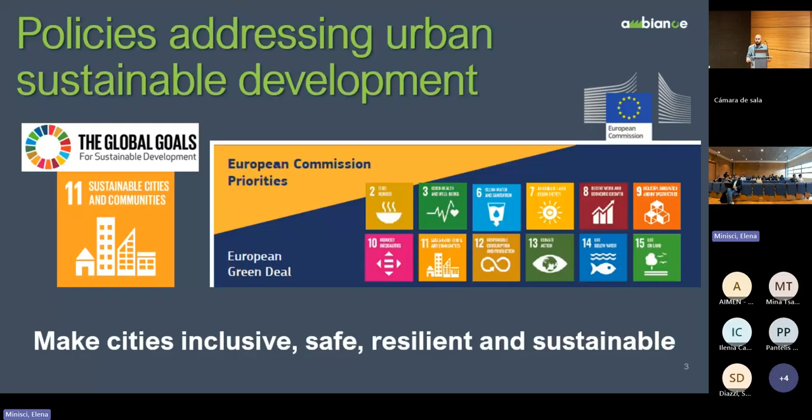So it is quite important that urban development is guided in a sustainable, resilient way, so that this will contribute to the sustainability and sustainable development of the whole society.

In this context, the AMBIANCE project tries to address problems of development in urban spaces through new environmentally friendly materials and products, and new digitalized processes. So AMBIANCE is in the context of the so-called twin transition, the environmental and digital transition together.

From the product side, the idea is to develop new bio-based products which have the same characteristics as oil-based raw materials, because a bigger problem of the adoption of bio-based products is that you can make them, but they are usually either more expensive or have less performance.

So the AMBIANCE goal is to have products which have the same characteristics and properties as original products, and to use digitalization to optimize the processes, in particular in this case the processes of extrusion, large-scale additive manufacturing, and compression molding, to make them efficient and sustainable.

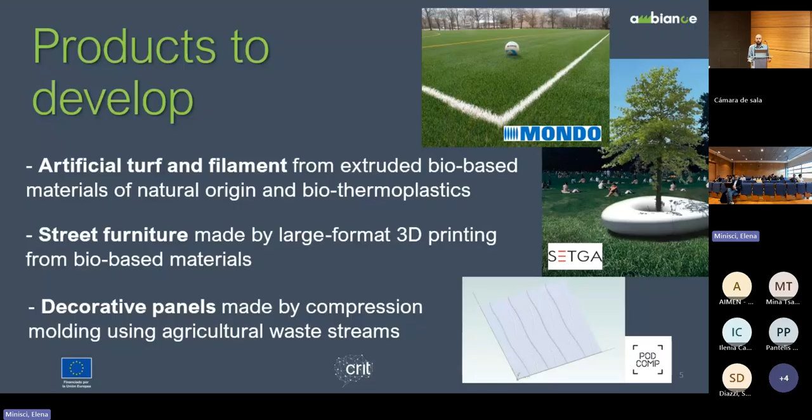And the digital technologies that are used, and that will also be discussed in this training in more detail by the speakers: physical simulation of molecular dynamics, parameters and properties; the use of machine learning models to identify the relation between parameters and optimize processes; and the hybrid digital twin that joins simulation and machine learning, and also uses data taken from non-destructive testing, to have an efficient model of the process.

So some of the challenges that the process had to solve to give us the result are the resistance to weather, because these are objects intended for outdoor use, so they must withstand rain, wind, frost, and must have a long lifespan.

Then, to guarantee that at the end of life these processes are either recyclable or reusable, because biothermoplastics made of bio-based products solve the unsustainability of the manufacturing phase, but not necessarily the end-of-life sustainability. So one needs to develop something that is recyclable or reusable.

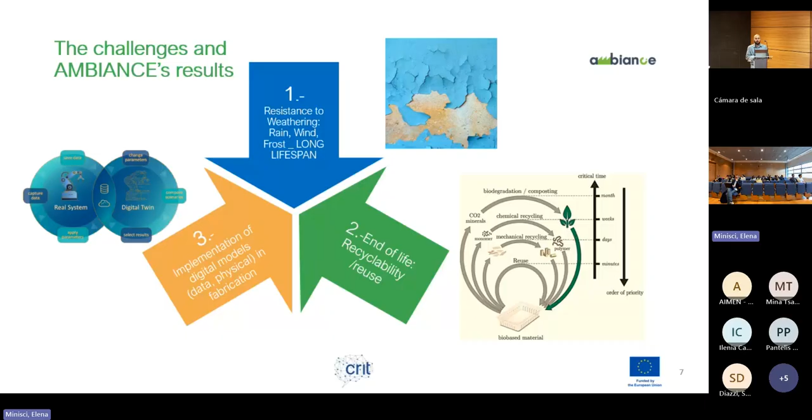And the third one is the actual implementation of the digital models. Now, some of the results will be discussed more in detail in the speaker presentations. I'll give you some examples here.

In the SETGA use case, the street furniture, AIMEN and SETGA could demonstrate that the plastics used for the furniture have only a slight color deviation after exposure, so it can be used outside where there is sun, and it will not lose its aesthetical properties. This was demonstrated both in a climatic chamber and in real exposure, and you will see them outside tomorrow.

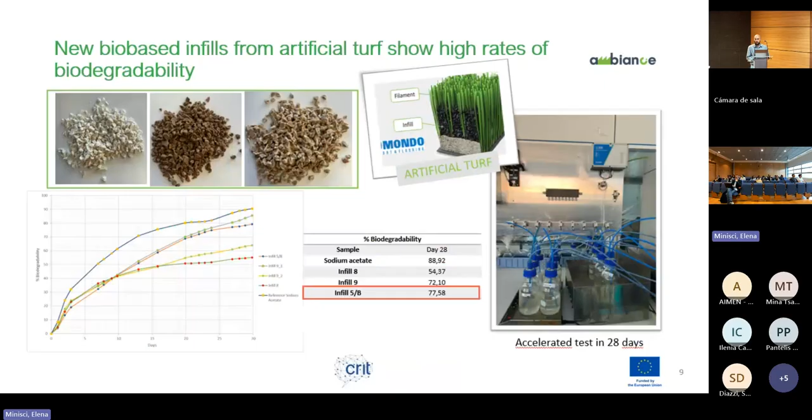And also for the Mondo use case, the artificial turf was shown for the infill, the part that is not green filament but the parts below, to have a high rate of biodegradability, and that the filament is also recyclable.

For the optimization part, it was also possible to implement a new system for data acquisition, high-speed data acquisition, monitoring, and analysis of results by precisely measuring the filament profiles, to also have information on the manufacturing process.

And for the SETGA use case, AIMEN was able to develop a real-time temperature monitoring system that could efficiently monitor the additive manufacturing deposition of the bioplastics.

And AMBIANCE is a European research project, so it has as a goal, as I said, to develop processes and digital processes. But there is a third pillar, which is the impact valorization. So all the actions that are taken to not just have some research results that do not have any impact on society, but to do whatever we can so that results from a research project can contribute to the whole society.

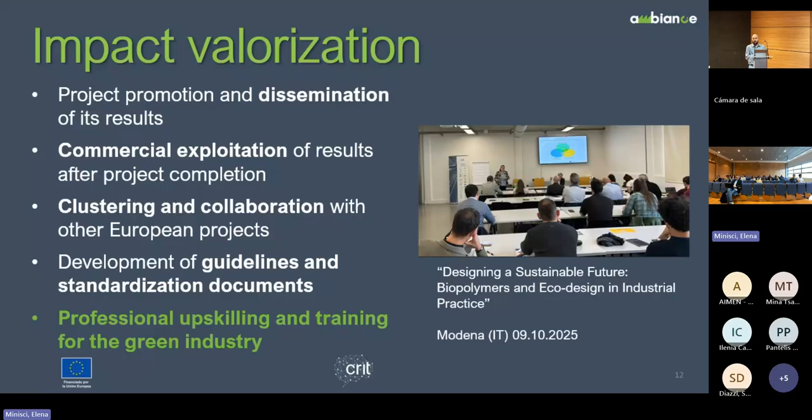And finally, there is the organization of training to promote the dissemination of skills needed for the green industries. We did last year an event in Modena on LCA and eco-design. And today we are doing this event here, which will have 4 modules from project partners ITA, SUPSI, CRIT, and AIMEN. And we will discuss in more detail what I just briefly touched on, how these technologies were used in the AMBIANCE project.

You will see a deeper analysis of these technologies: the physical-based simulation models, the LCA specifically for bio-based products for 3D printing and other applications, non-destructive testing on bio-based material, and how to evaluate sustainable material for the process of additive manufacturing. You will see the theory in more detail, and some applications in the AMBIANCE project from the partners who developed them.

And tomorrow there will be a showroom in Pontevedra, close to here, where the AMBIANCE solution will be installed in a public square, the Plaza de Barcelos. I invite you all to come and see the product tomorrow. You see a small demo here, but you will see them on a larger scale, outdoors, where you will see that they are actual real products that can be used in outdoor urban spaces.

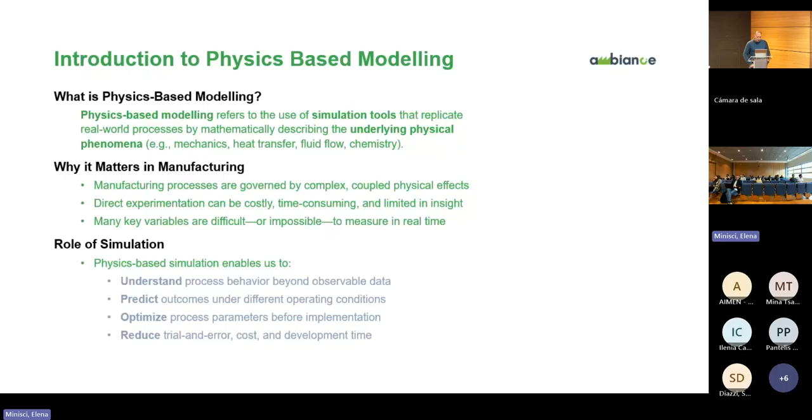scenarios. Predicting some magnitudes using these tools in a virtual environment can help to pre-optimize parameters or at least understand sensitivities. And this, in the end, is expected to reduce the trial and error on the experimental side. So, what we have done in the framework of AMBIANCE.

So the first use case is the artificial turf filament stretching in the Mondo manufacturing plant. Here we have a scheme of the process. The process starts with the extrusion line that has material coming in in the form of plastic pellets that are extruded, and then there is cooling.

It goes to the stretching part, which is the one we have focused on with this simulation, composed of some godets, wheels that control velocity and temperature and make the filament pass over different ovens at different temperatures. By controlling the velocities of these godets, we control the stretching imposed on the filament. So what we have done here is to focus on this stretching process.

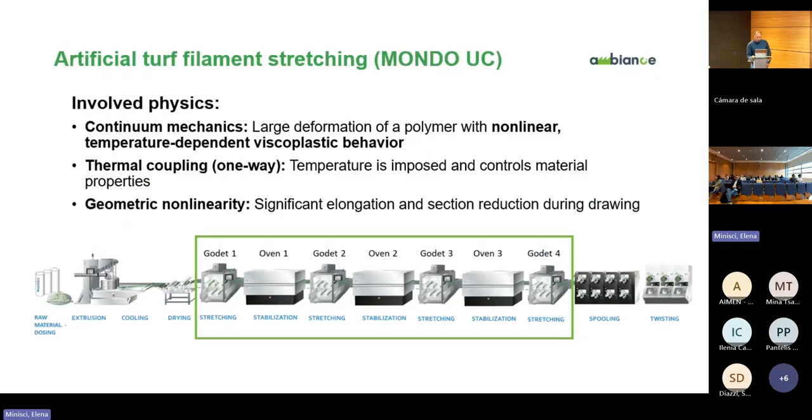So more or less, I'm going to follow the same scheme for all the use cases. Some brief notes of what we are doing here to develop these models. First of all, we need a geometry. In this case, we are taking the filaments at the end of the extrusion. So we obtain this section just after the extrusion, and we convert this into a finite element mesh to be used on the process.

And here, probably the most interesting thing is to characterize the material behavior, because in this case we need to perfectly reproduce the viscoplastic behavior of the material. That means that we need to characterize at different strain rates, typical of the velocities we have on the godets of the process, and also the dependence on temperature.

The range of temperatures and the range of strain rates are selected to cover the expected ranges in the real processes. This process has been repeated in the AMBIANCE project for several materials and several combinations of bio-based materials. So we completed this characterization in order to model the behavior.

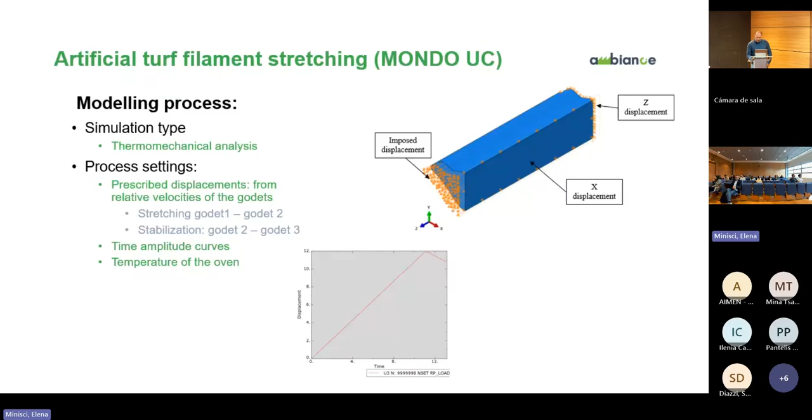Once we have the model set up, it is time for the exploitation of the model, and we do this by means of a simulation DOE. This requires defining suitable ranges for all the velocities of the godets, and establishing a DOE strategy to create the DOE matrix. And here we are quite dependent on how heavy or costly our simulation model is, and the number of parameters we need to cover the design space for this manufacturing.

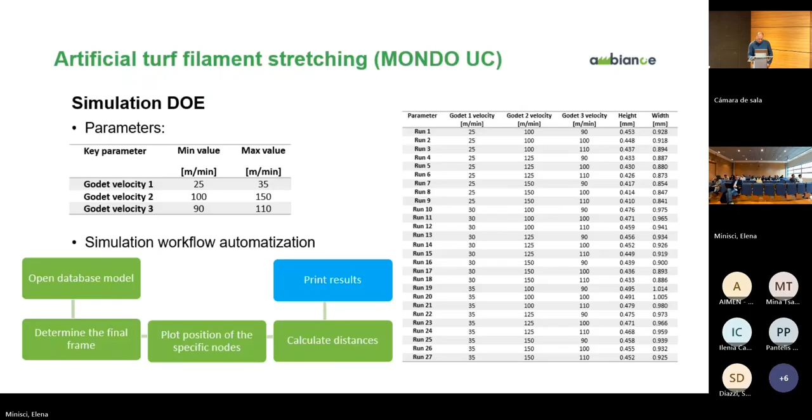So here, depending on the case, we use more or less simulations, but in order to be efficient, we need to make automations on this simulation process in order to generate the different models, changing the parameters, obtaining the results, and printing the results in some files or data frames that we can use afterwards. And here we have one of these results.

We have all the data frame, then we go to the ROM building. That means we need to build a model that is much quicker than the full simulation model, but retains the important results, the ones that we want to use afterwards. In this case, for example, we have two results: the height and the width of the filament, and how they depend on the godets' velocities.

So basically, adjusting a ROM means that you look for a model that minimizes the error with regard to the DOE-generated data, and you can use it afterwards. So that's why we always take care of the error metrics. They give us the quality of our ROM reproducing the full model results. So that was one of the cases, more or less one case that is mechanically dominated.

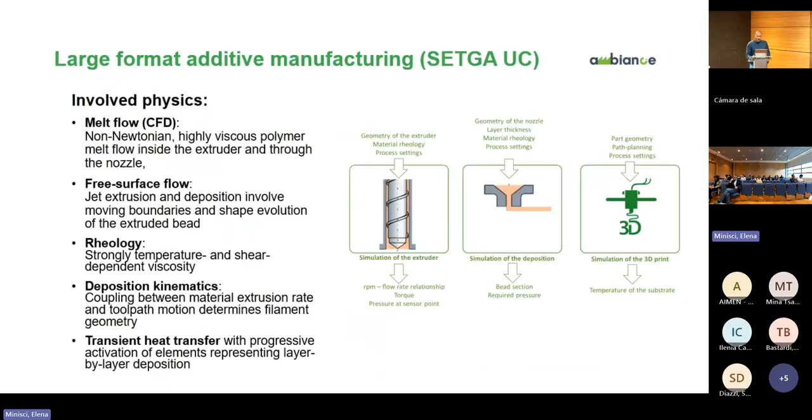Of course, everything is dominated by the rheology of the material that is highly dependent on temperature and shear rate, and also the deposition kinematics that couples the extrusion rates and the motion velocities of the robot. And finally, very important is the heat transfer phenomena that determines how the adhesion between the layers would be. So let's go for the first one.

The first one, we have made a simplified model of the inside part of the extruder, everything that is inside the barrel and the screw. The material properties for this type of simulations are experimental rheological curves that have been made by AIMEN. Here we are simulating the rotation of the screw inside the barrel at a steady state regime. So the flow is laminar.

And here we involve several boundary conditions. First of all, the coupled flow rate and RPM. This is a relation very important in extrusion. So we impose one to get the other. Also, we have a condition at the end of the extruder where the nozzle is allocated. We need to provide several possibilities of incorporating different nozzles of different diameters. That means different resolutions, and also the temperature. The temperature is a representative temperature averaged on the extruder.

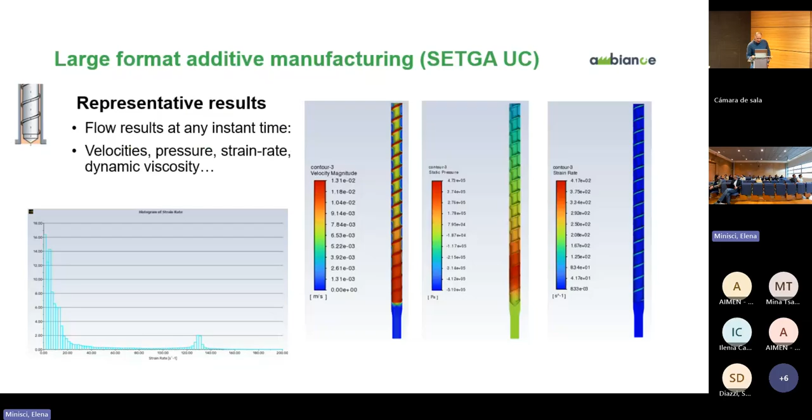Yeah. So next step is, as before, we need to define some ranges.

Sorry, you lost the share. No, sorry. Continue. It's okay?

Yes. Okay. So next step is to define the ranges. In this case, we have followed the data from the rheology, and we have extended to cover a little bit more of range on temperatures. We have analyzed the full range of flow rates for the extruder, and we have assumed some levels for the pressure loss at the end and in the nozzle in the gap with the layer. As before, I'm not going to explain more now.

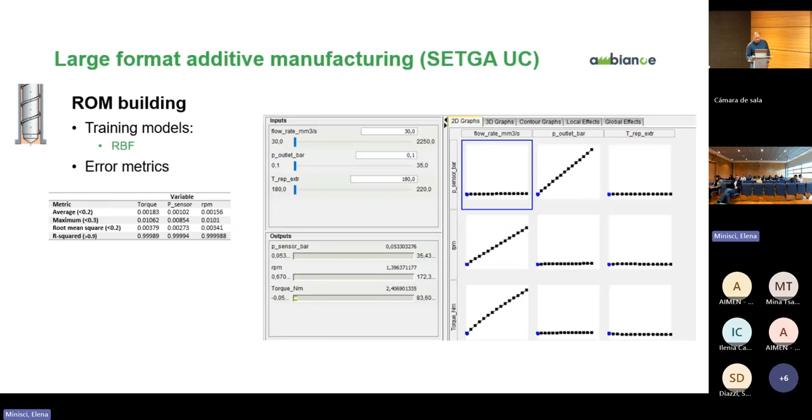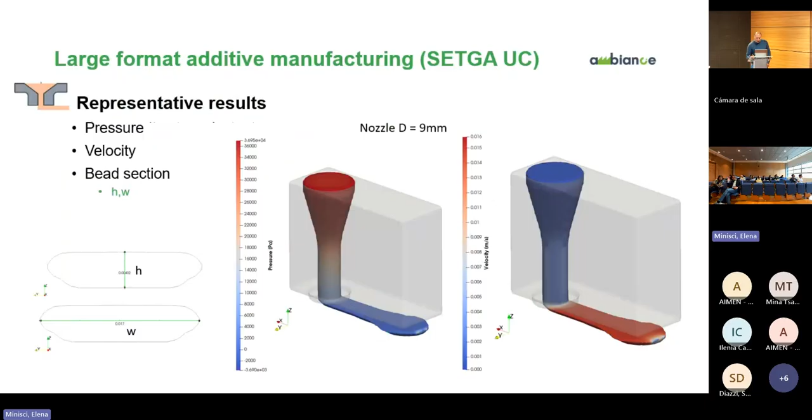We can access, as before, the full distributions of pressure or velocities. But in this case, we are quite interested in the resulting section of the filament that we can parameterize in a simple way by the height and width. These parameters are extracted from every combination we make in the simulation. So as before, we define a DOE.

In this case, we cover the different diameters that have been used on the real fabrications, and we parameterize as a function of this diameter, because in additive manufacturing, there are several ranges that are recommended for the height and the width of the filament as a function of this diameter. Also, we cover the velocity ranges that we can afford. That means that in the end, if we define the height and the width and the velocity, we need a flow rate. But this flow rate needs to be between certain limits. The limits are the limits of the extruder. And also the velocity is controlled and is imposed in several limits.

So for all of these simulations or this combination of parameters, we check the flow rate and we analyze the limits to be inside the extruder limits in terms of flow rate and for the ranges of the velocities. That means that we are covering all this suitable range for the velocity. Next, we have the ROM building time. Again, we are using a radial basis function, and we have a new piece of model that covers this nozzle for different layer heights and widths of the filament and flow rates and velocities.

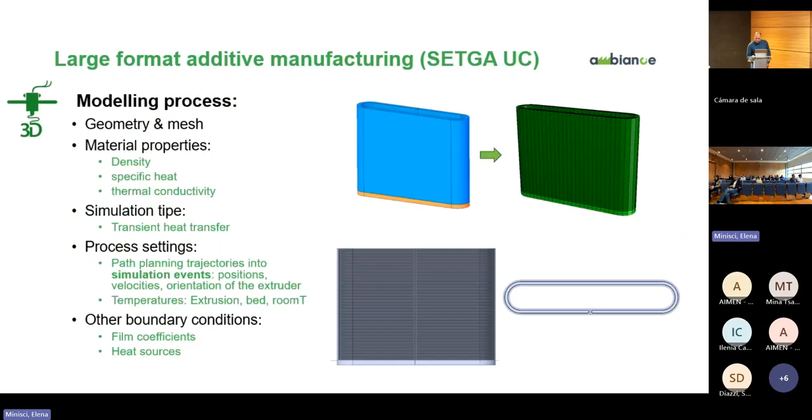First of all, I have to mention here that we have in the model some parameters that need to be adjusted, because not everything depends on material properties. There are a couple of parameters related to convection that cannot be obtained from the material diagram. So we need some tests to adjust these coefficients, convection coefficients, and if there is any heat source like radiation panels or so on.

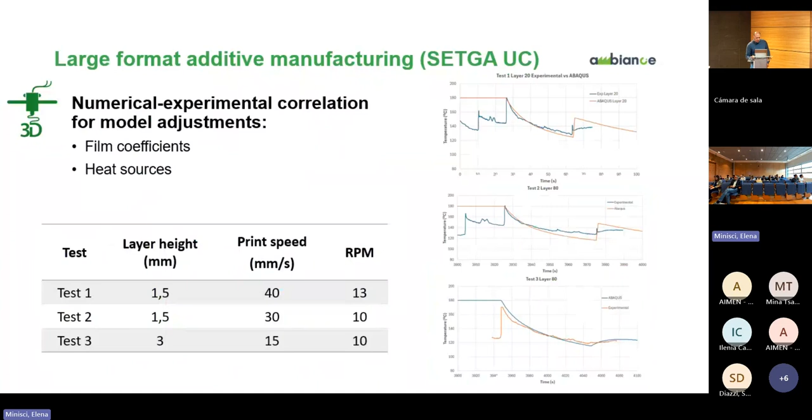For example, we have here one of the simulations of one of the furnitures. This is one informative panel, a support for this informative panel. And here we can see how it's building, again, layer by layer, and how the temperature is evolving continuously over the time. And again, we have here the typical curve where we analyze the temperature drop at the cooling between one layer and the next one.

Here, for example, we have used this model to analyze what will be the effect of changing the printing velocity to slower velocities or higher velocities. And we can see here the effect. So our base simulation would be the orange line. And if we go to a quicker printing, we get higher temperatures on the substrate. If we go at a lower velocity, we have very low temperatures.

In this case, for the material we are using, AIMEN determined a processing window that recommends to have this substrate temperature in a certain range, around 160 degrees. So we can analyze by simulation what would be the velocity required to be in this range.

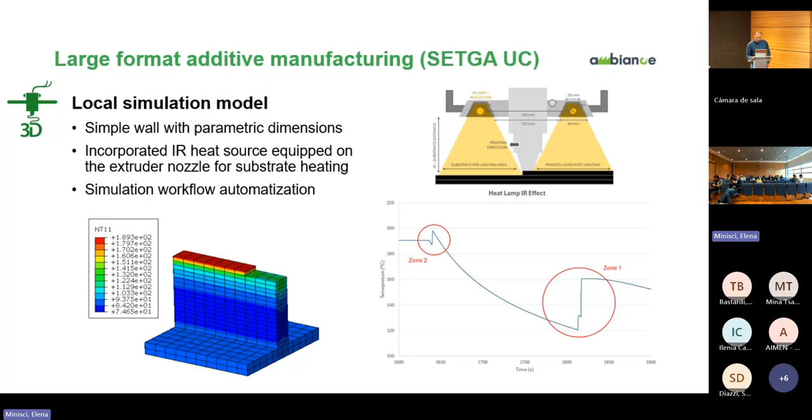And then also when we have reached the substrate temperature, the infrared, before printing the new layer, is heating again, and we have this jump in temperature. That is the effect we are looking for: temperature of the substrate before the new material comes. So more or less these two jumps are quite similar in magnitude, and in this case, this is the point we are interested to extract from the simulation.

Again, we generate a DOE. In this case, it was a larger DOE. We managed with 7 parameters, combining geometry, dimensions, temperatures of the extruder, temperatures of the bed, the infrared heating, speed, and layer time. So again, we built the ROM, and we have one model that gives us results for different layers, heights, and also we have the possibility to obtain the temperature at different points of the bead, in the center or in the side. And more or less, this will cover the full simulation models for this case.

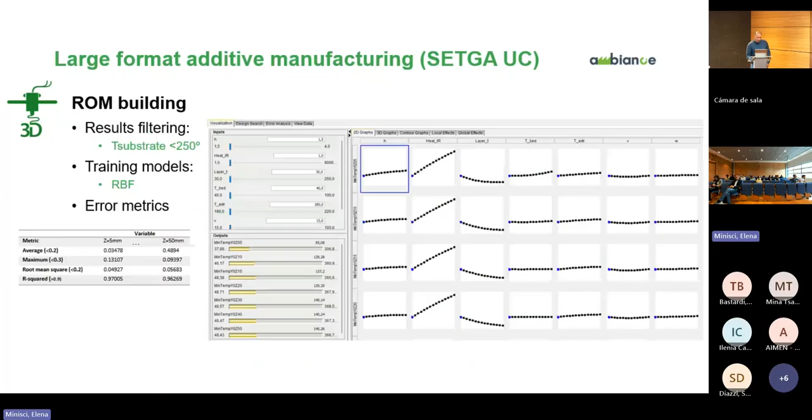This case requires an additional step, because all the models we've seen before are like building blocks of relevant parts of the process. But to make them run together, they need to be orchestrated, meaning connected, because some outputs from one model are inputs for the next one. Everything needs to be connected to the parameters of the printing process. So this is a top layer where these models are orchestrated and made to work together. Okay, let's go to the last use case.

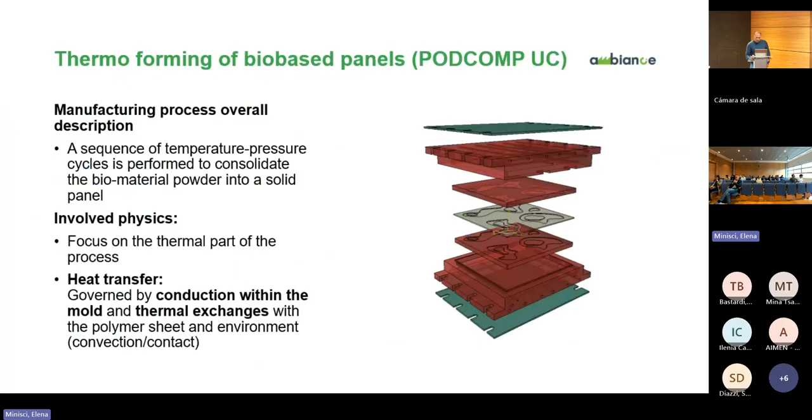In this case, it's the thermoforming or compression molding of bio-based panels in the PODCOMP use case. Here we're dealing with a mold that comprises powder material coming from biomaterial sources, in a more or less powder-like form, which is converted by the application of temperature and pressure into solid panels. We've focused on the thermal behavior of this compression process, so we again have a heat transfer process governed by conduction in the mold and thermal exchanges with the polymer panel—here the polymer is a bio-based material—and the ambient. What we have here is more or less the distribution of components inside the mold.

The important thing regarding the process condition setup is that we have heating elements. These are electrical cartridges in charge of heating the mold to the targeted temperature. Our models have incorporated these heating elements, and we have the possibility to change the power supply to each one of them.

Again, in this case we covered a very wide DOE of simulation. We performed more than 2,000 simulations because we have many input parameters. Basically we have 12 heating elements and a constraint on the total power supply, which we keep under control within a certain range.

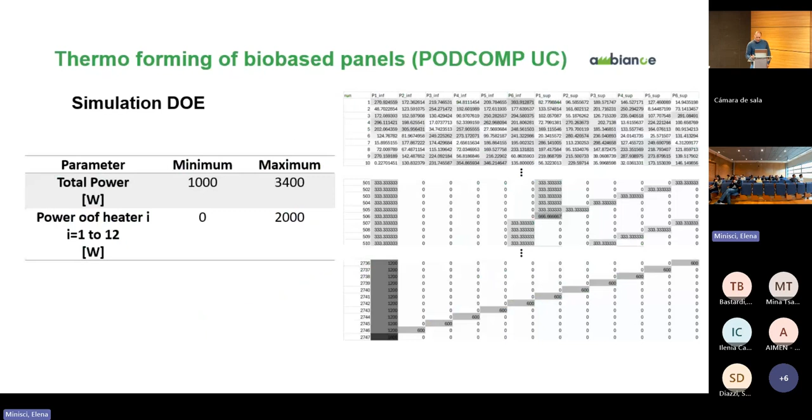I want to stop a bit more on this use case because it's interesting—different from the others, because we used a different technique for the ROM building. In this case, we're not interested in punctual values; we're interested in the full distribution on the cavity surfaces. So we use a different technique called proper orthogonal decomposition, in combination with singular value decomposition.

This consists, more or less, of an algebraic process that takes all the simulations we've done in terms of temperature results for all the nodes of the cavity surfaces, organizes them into a matrix, and then decomposes this matrix to obtain what we call the orthogonal modes. Orthogonal modes are like the ways the temperature can change across the domain, and we also have singular values that tell us the importance of each mode.

So if we have 2,000 simulations, we could potentially have 2,000 modes. But the good thing is that only a few of them are relevant, so we can truncate all the matrices by selecting a number of modes based on the singular value of each mode. Then we have a training step, making a linear regression between the powers supplied in the simulation and this truncated matrix, for the determination of new combinations.

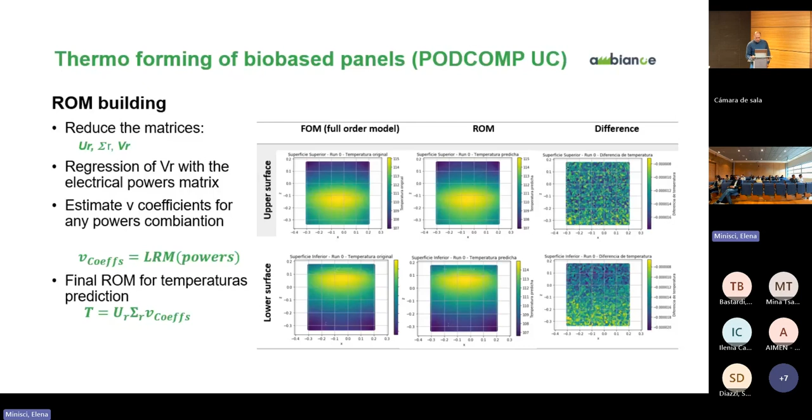Okay, so let's go to the integration. We have seen here several pieces. One of the ways to make this available for use is to integrate this into tools, like user tools that the operator can use to change parameters and obtain predictions.

I don't know if we have time to make a little demo of how we are. So basically, we have here one of these building blocks, in particular the thermal ROM for the 3D printing models, and we can select one of the variables, for example, the temperature on the substrate, and show the influence of this parameter.

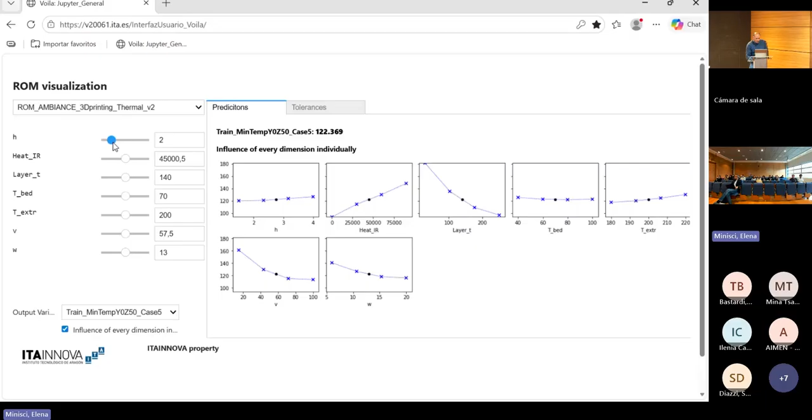So if we are at this point, we can see how, in this case, the temperature on the substrate is affected by the different parameters: the height of the layer, the heat of the infrared, the time of the layer construction, and velocities, etc. So what the operator can do is change whatever parameter, just by scrolling, and the interface allows the user to change any parameter and instantaneously get the temperature we want to see.

We can also define some tolerances. For example, I can select the tolerances, putting the recommended limits for this temperature in a range. If we go back, if we are below the limits, we get alerts, and we can try to move to get this in the right direction.

But you have information on the graphs. So if you want more temperature, you can see the parameters you can work with. For example, I can reduce the layer time, making the robot go quicker. We can reduce this, and instantaneously obtain the new solution - not only at that point, but also all the neighbors, because these graphs are dynamic and change their sensitivity depending on the point you are at.

So you can work with the infrared heater, for example. Now with this combination, we are already in the desired range. So this is more or less what would be the use of this tool for an operator to make virtual trials. Okay, so let's change again to the presentation.

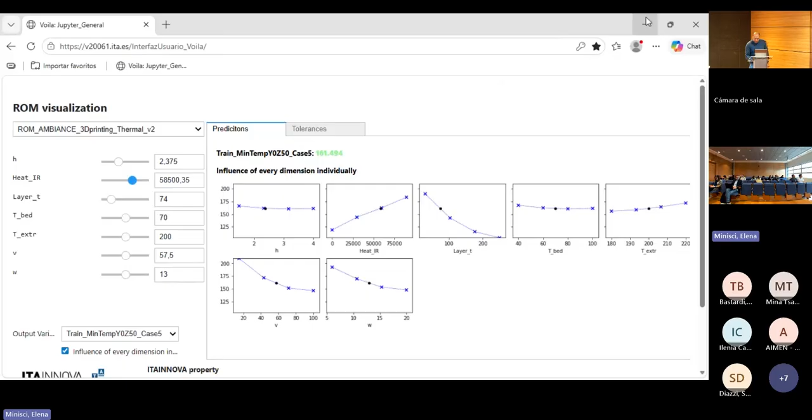So this was the first possible use of ROMs, how to take profit of them in a manufacturing workshop. The next one is to not make manual trials, but connect them to the monitoring system. That means the digital orchestrated model is connected directly to the streamed parameters from the line.

In this case, it takes certain parameters of the line and takes them as input for the models. And then they provide instant predictions as outputs for every single point we have on the frequency we have used on the channels of the monitoring system.

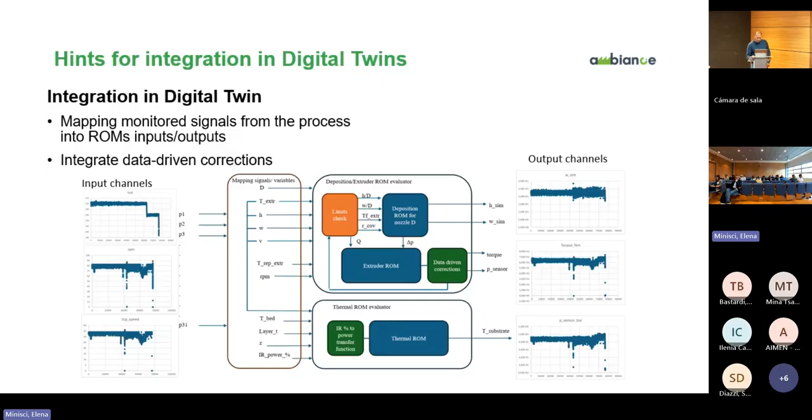Okay, we're at the end. A summary: what is physics-based simulation, how we exploit it in DOEs, how we convert it into reduced order models that run on the fly, and how this can be integrated into decision support tools or directly into digital twins for quality monitoring, making this run connected to the line.

Basically, the difference between these two types of usage is: the first one, integration in the decision support tools, is basically for virtual tryout - making a lot of virtual trials in very little time in order to better understand the process. Because we see the result, but not only the result, we see dependencies and how further changes on the parameters would allow us to modify the result as we want.

This is the trend analysis. I have not mentioned that these models can also be integrated into optimization engines to search for the best parameters by specifying targets for the outputs. And it's also useful as a training tool, because for a new process, we can get the feeling of how sensible it will be to the parameters for every new geometry.

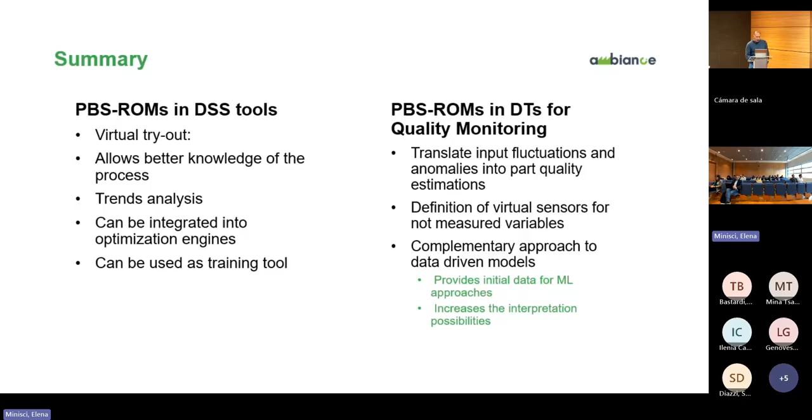And the power of these approaches is that they combine quite well with machine learning approaches, because they have different advantages and disadvantages, and when combined with data-driven models, they can synergically work together to obtain the best results. So that's the concluding remarks: physics-based simulations provide a deep understanding of the process, in this case, manufacturing processes.

They require the use of multi-physics simulations because many of them involve different physics at the same time. The use of reduced order models allows us to make this available for real-time processes because we drastically reduce computation time. This is how we can integrate these into approaches like decision support tools or digital twins. Okay, that's all, thank you very much for your attention.

I have a question, Manu. When you do this physical-based modeling, do you need the parameters of the material itself?

Yes. But for instance, I think the material for all three use cases is composite, with a lot of interaction between the fillers, reinforcement, and the matrix or binder. Did you consider that in the simulation? Well, the simulation can be set up depending on the interest. What we have seen here does not consider that scale of the material composed of micro or nano constituents, because we have been focused on the overall process. So for us, in these simulations, the material is treated as homogeneous or homogenized. But of course, there is the possibility of going into micromechanics simulations to consider these types of effects.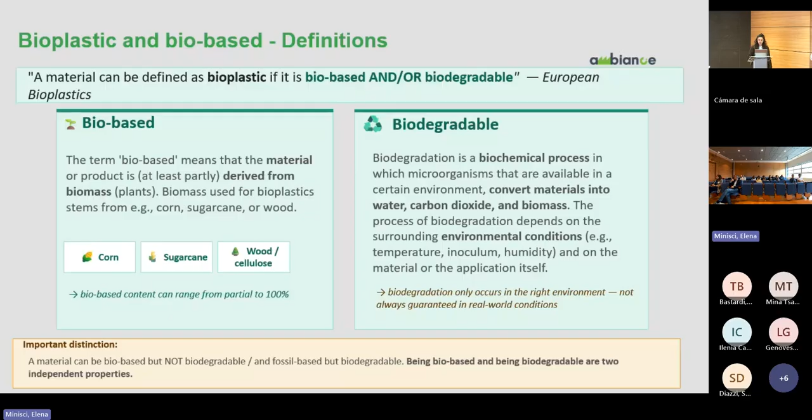So all this information is important because we have to know that there could be some bioplastics that are bio-based but not biodegradable, and some bioplastics that are fossil-based but biodegradable. So to classify bioplastics, we have three categories. The first and most common category are bioplastics that are bio-based and biodegradable, like PLA. So they are composed of biomass, and at the end of life, they can decompose, can be compostable or biodegradable.

Then the second category are the plastics that are bio-based but not biodegradable. An example can be bio-PE and bio-PP. So these are materials that have the same chemical and physical characteristics as conventional plastics, but at the end of life, they have to be managed, treated in the conventional sites like recycling, incineration, and landfill.

And then the last category are fossil-based but biodegradable plastics. So these are like PBAT. So these are bioplastics that are not derived from biomass, but from oil. So they usually have limited environmental benefits compared to the other bioplastic types.

What is important to know about bioplastics is the biomass origin. So we can have basically three generations of feedstock. The first one is the first generation. So this category are bioplastics that are generated from food crops, like corn, sugarcane, soy, and so on. And what is the problem with these bioplastics? The problem is that there is the risk of competition with the food supply, so with land use. So sometimes land that before was used for producing, let's say, food crops is then reused to produce bioplastics. So this is the main problem.

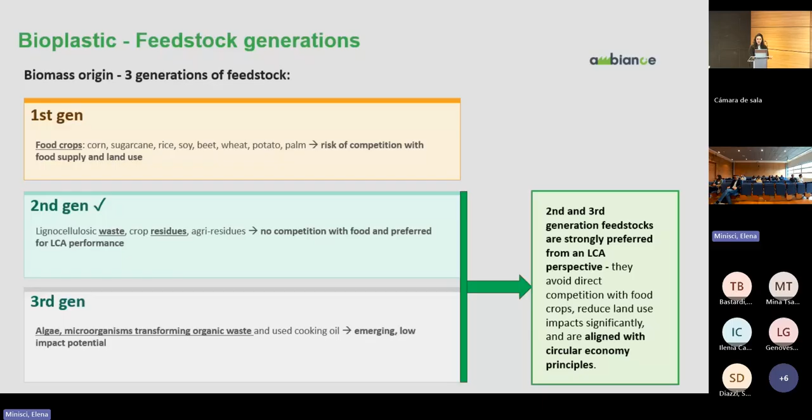And then the last category is the third generation. In this case, this category is composed of food waste that is converted by microorganisms into biomass. So it's still an emerging technology, so we don't have many examples of these bioplastics, but they have really good potential in the future for their low environmental impact. So we can say that the second and third generation feedstocks are the most preferred alternatives, because they are most aligned with circular economy principles.

So now the question is how to assess the environmental performance of the material. The best methodology to use is LCA, that means life cycle assessment. That is a systematic process to evaluate the performance of a material or a product throughout the whole life cycle, starting from the raw material and ending with the end of life, the disposal of the material. The objective is to identify the opportunities, advantages, and disadvantages of a material in terms of environmental performance. And also we may want to conduct a comparative LCA to compare, for example, bioplastics with conventional plastics or other materials.

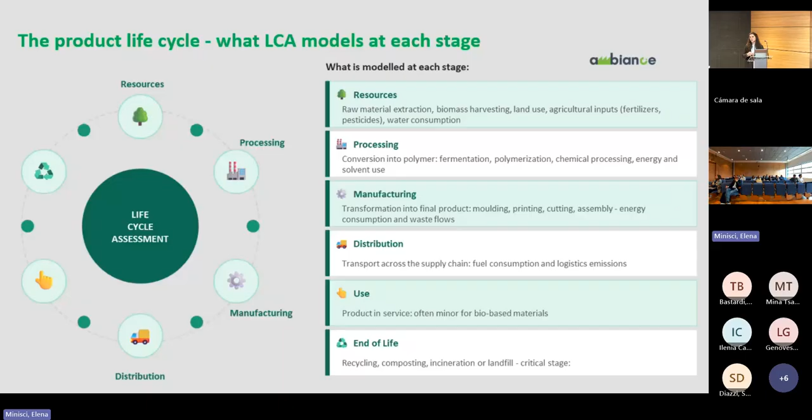Then there is the use phase, so which are all the implications of the energy consumption, material usage during the use phase of the material. Like in our use case, we have considered zero. We haven't considered this phase because we have zero consumption using the products. And then there is the end of life phase. That is one of the most important ones because depending on which treatment you have of your material, you have different environmental performances.

So why is assessing and conducting an LCA of a bio-based material complex, and what do we have to consider? So we have to consider, as I said, the raw material origin. So which kind of feedstock you are using for producing your bio-based material or bioplastic. Then you have to consider all the agricultural practices. So everything that happened during the agriculture of the crop. So which are the fertilizers, which are the transport, the treatment of the crop.

And then you have to consider the land use change. So what I said previously, if a land was previously used for another crop and then converted into a land for producing bioplastics. Then other aspects are the energy source mix, so the type of energy used during the process, and this depends a lot on the region in which you are. So if you are in Spain or in Switzerland or in Italy.

Then we have the polymerization process, which is the problem here. The problem is that when you produce a conventional plastic, the technologies are really efficient. In the case of new bio-based materials, the technologies are not really advanced, so there could be more consumption, more scrap, and they can have lower environmental performance due to this process. And then the last part is the end of life. So if the material is biodegradable, if not, whether it can be recycled or not. So all the evaluation on this.

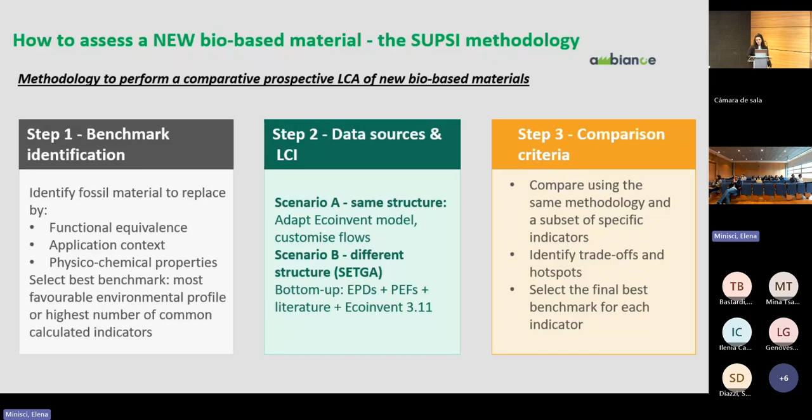And then at the end, we have the third phase, that is the comparison. So you have to pay attention to which characterization methodology you use to assess this material. It has to be the same also if you use different data sources. And then you have to select the best benchmark for each indicator.

The possible sources where you can find the data for your LCA. We have the EPDs, environmental product declarations, that are certified documents usually provided by the producer of the material. So they are really specific and reliable because they are certified. So if you have these EPDs available, it's the best way to proceed. So you have to choose this document.

Then there is the PEF, that are some EU guidelines that help you in conducting the LCA. So what you have to consider, what you don't have to consider. Then there could be some literature sources. So you can search the literature and find some papers about a specific material. So you can use directly the impact if they use the same characterization method from the paper, or you can just take the inputs and outputs from the paper and reconstruct the material, so calculate your environmental performance.

And then the last one, that is the most used one, is ecoinvent. It is a database where you can find some background process materials. But the problem in this case is that it's not easy to find bioplastics in this database. They are usually not available, and data are usually generic. So you can use a generic PLA to model a specific PLA, like the one that we have used for SETGA.

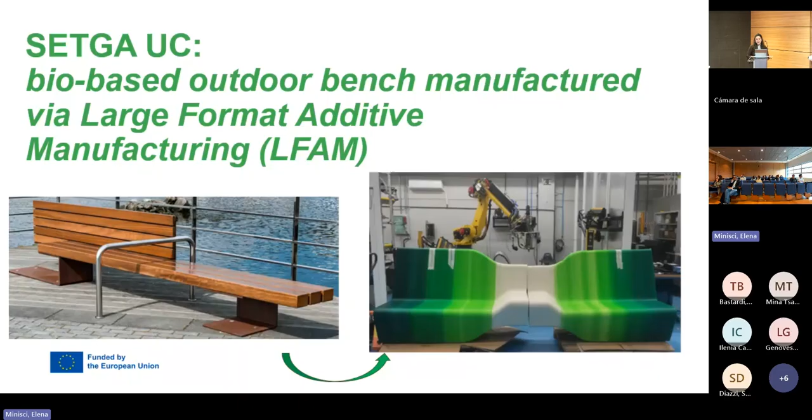Then if we move to the AMBIANCE project, the second use case, in this project we have analyzed 3 pilots that each developed a new kind of bioplastic or bio-based material. In this case, for SETGA, the comparison focuses on an existing scenario where there is a standard outdoor bench, like the tempo bench in the photo on the left, that is composed of wood and steel, and then the new bench that was developed during the project with bio-based material, bioplastic, using large format additive manufacturing in AIMEN.

So following the LCA methodology, first of all, if we want to perform a comparative analysis, we have to define the goal and scope of the assessment. So the first thing is the functional unit. For this case, we have identified as functional unit 1 outdoor bench, providing seating for 4 persons. And as system boundaries, we have considered the cradle-to-grave approach. So we consider the material from the raw material extraction to the end-of-life disposal. And the methodology is the EF 3.1. So after defining all these aspects, we have to move to the creation of an inventory.

So we have to collect data, if it's possible, primary data from the pilot. Like in this case, for SETGA, we have collected data on the materials, so on the steel and on the wood, on the manufacturing processes, so which are the sequence of processes to produce the final bench, which are the scraps, which are the energy consumption, the water use, and so on.

And then we have also collected some information about which is the end of life of this bench and of the two materials that compose the bench, like the steel. And then for the bio-based material, we have still collected information on the composition of the material, because it's a composite material of two different types of PLA, and with glass fiber to give it the best properties for printing.

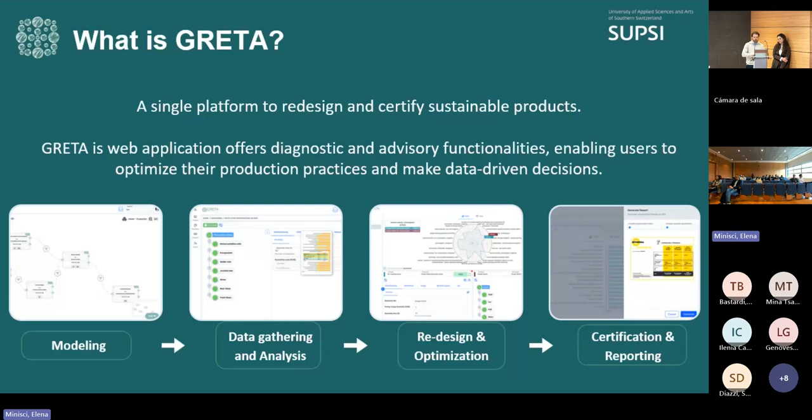To go into a bit more detail, as I said before, Greta is a platform, so we have two main environments. We call Greta Builder the part more for a sustainability expert, where we basically build the model and can collect different sources and methodologies. And then we have what we call Greta Compass, which is more related to non-sustainability experts, for interpretation of the results and optimization.

So under these two main environments, we develop different types of project-specific functionality. In this case, for Ambiance, we have the bio-based part that basically incorporates all the methodology we developed, and also highlights the different scenarios and indicators that we need to consider.

To go a little bit more in detail, Greta Builder is the modeling part. It's simple and intuitive because we think of a dashboard in terms of visual modeling, so it's drag and drop. You have everything on the path to model a product or process, and the platform tries to help you do this by giving all possible warnings if something is missing, but also makes it possible to build a model not just to see one single product or process, but to represent more possible scenarios of this product and process.

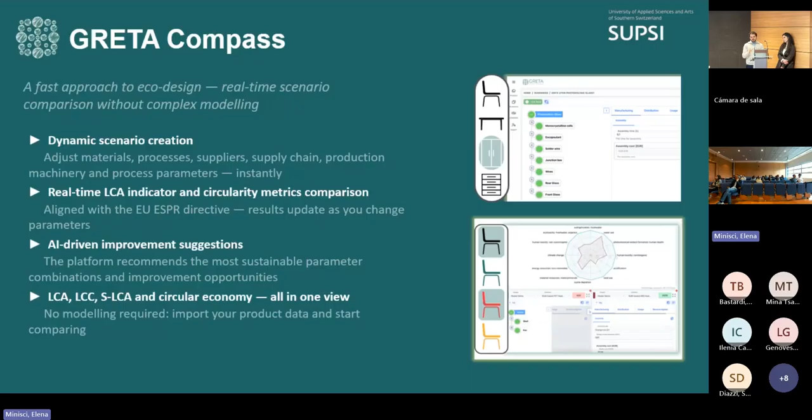And of course, as you can see in the second picture, you can have different types of scenarios of the same product with different characteristics. This part is really important, especially for eco-design, but also for Ambiance, because we understood that during the design phase, whoever develops the technology or material can really benefit from understanding before finalizing the process if the direction is right or not.

And the eco-design function incorporates a little bit all this feature. Of course, as I say, the platform is developed across different types of projects, so you can see some specific functionality in terms of EPDs or PCR or full traceability of the data. But basically, the main idea is to give concrete support to try to certify a new product or process, or better, at least try to improve the product and process in terms of sustainability performance.

The integration - Greta, as a web app as I said before, is fully integrated. So what does that mean? We basically have integration from output, so we can send the result of the LCA to different types of sources, whether it's just a label, a DPP, or an EPD, whatever is needed.

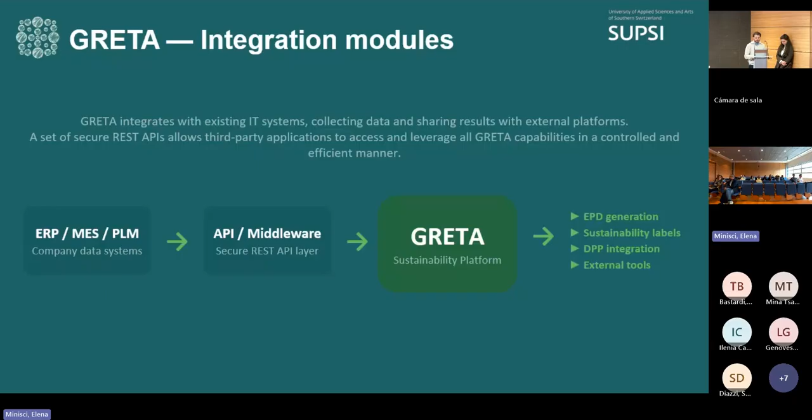Just a really quick video to show you what I said. Here you can see the modeling - so in Greta Builder, you can drag and drop all the process and connect it quite easily, and the model builds the product it's representing. Then in Greta Compass, as I said before, you can switch from one material to another, see all the results, and compare multiple scenarios.

So in the radar chart, in this case, we have all the indicators, but we can select specific ones. Now, at the end of the demo, you can see that in the choose scenario option, you can basically select all the alternatives you want in real time in the radar chart and see the results. That's all from our side, I think.

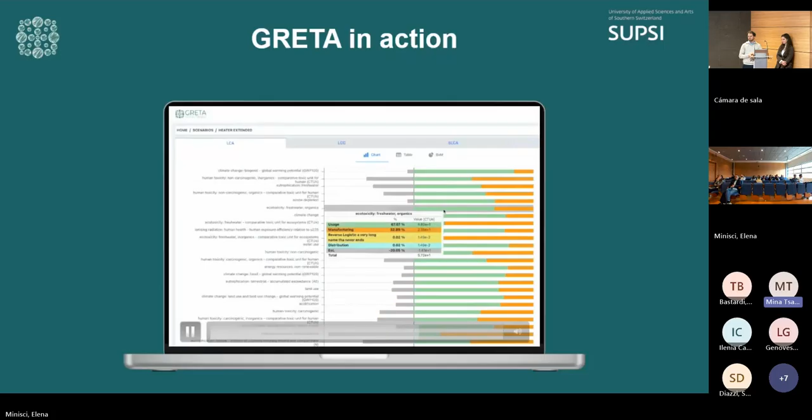There is one question online: when you realized the LCA of the bio-based bench, did you use the PLA Luminy emission factor that considers the biogenic carbon embedded in the product? If not, why not? We are using it because we have to consider that indicator, since we need to account for the special benefit of a bioplastic, which is the carbon uptake. So it's important to consider that indicator.

At the beginning, I thought the analysis of the input conditions for the bench preparation was around 300 kilograms of scrap, and I wanted to know if this referred to the actual weight of the whole bench at end of life as scrap, or something else. No, it's a mistake, sorry—it's not 300 kilos of scrap. It's the amount of material used for producing the bench. Makes sense, thank you.

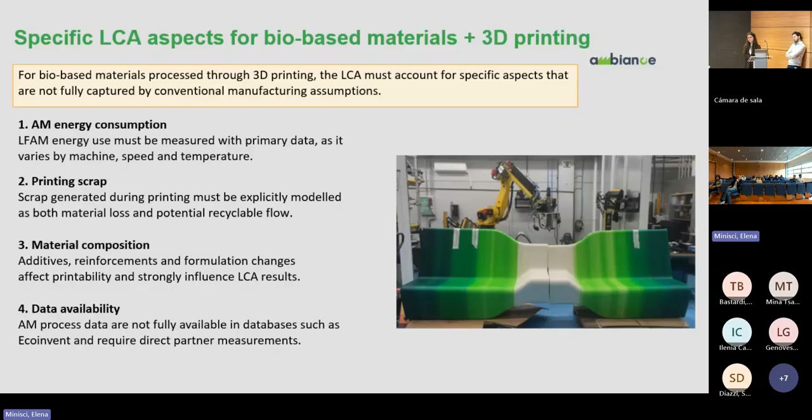Because it is always this question, what is better? Something that you need to create from new, like a bio-based solution, or something that is not bio-based, but was already there and has been recycled, and can be recycled again after. So the best solution is recycling for sure. So not creating something from new, because you keep the value of the product.

That's it, simple. So if the question is whether a bioplastic is better than a recycled material, maybe for some indicators a recycled material is better than a bioplastic created from virgin material, but it depends on the bio-based material. Also, take into account that the non-bio-based is not biodegradable, like for example PLA. Recycling is always better, but I don't know if it has a big weight that, even though it is recycled, it is not as biodegradable as PLA, for example.

The point is that, of course, in general terms, as Valentina said, recycled could be better. But I totally agree with you that sometimes it's not the case. For this reason we work a lot to allow the user to compare these scenarios, because we saw in the last year in different cases that there isn't a path that is always better, also because the recycling phase is really complex, depending on the material and whether we know the supply chain or not. So the difference between the two scenarios can be really important to consider.

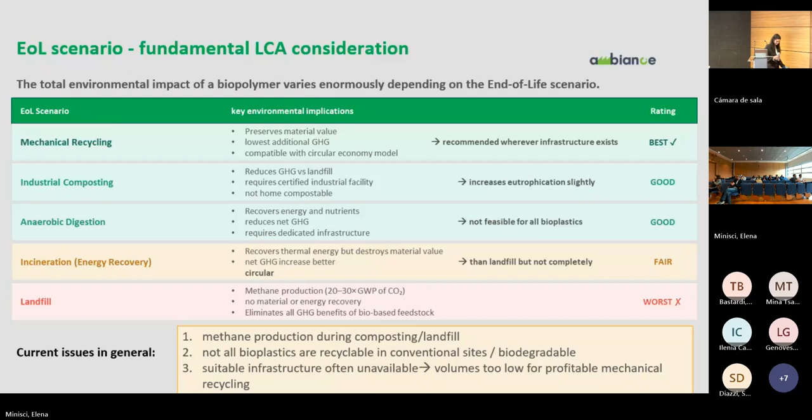Short intro again. Why is smart testing important for a greener future? It's because if we can detect the defects early, we can avoid producing defective parts. So it helps us to manage our resource efficiency and reduce our waste. The second point is that if we understand the material with non-destructive testing, we can extend the component lifetime.

And the third point is if we make real-time measurements during the production or the process, we can be more efficient with our energy and the processes of the production lines. So overall, smart testing can help us to reduce resources and energy consumption, and helps us to avoid environmental impact. And this is why non-destructive testing is essential for smart testing.

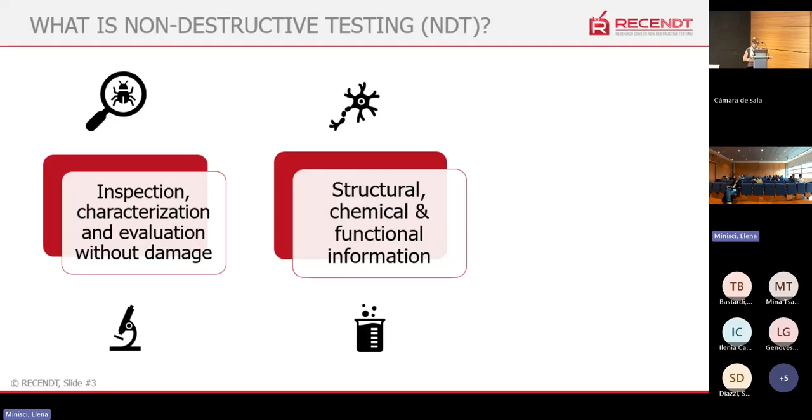So what is non-destructive testing? Non-destructive testing means that we can inspect, characterize, and evaluate materials and products without damaging them. This also gives us information about the structural, chemical, and functional behavior of the product. And in combination with this, it enables us to do inline and offline quality control or process control.

So bio-based materials: Valentina gave us a good overview about bio-based materials, so I can make it short. Many bio-based materials have challenges in their structure, how they build up with fibers, different fillers, combinations, and they are sensitive to moisture uptake. This gives them a lower durability and has an impact on their lifetime and also on their mechanical properties and limitations.

They are sometimes not easy to produce, and the processing of the materials is challenging. Some materials are easy to recycle, but some bio-based materials are not easy to recycle because of the combination of fossil-based and bio-based fibers, and also because of the end of lifetime. This is where NDT can help to contribute.

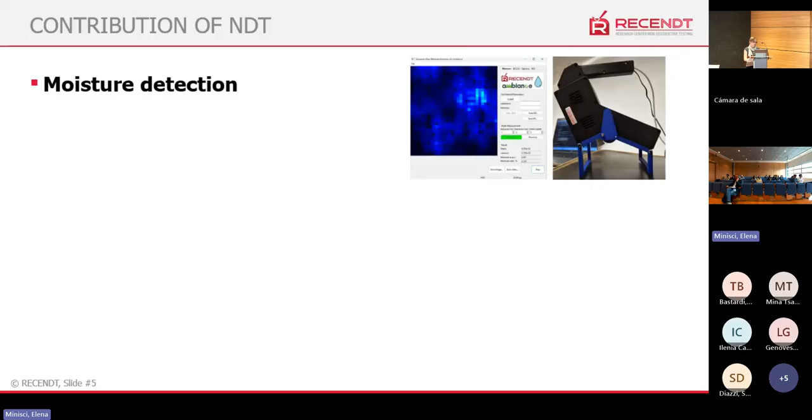We can easily detect moisture with many kinds of detectors, not only on the surface but directly through the whole sample. We can analyze with non-destructive testing methods the structural combinations and the fiber orientation, and give information about the mechanical properties, their strength, and all. One important thing is to avoid defects. With NDT methods we can directly detect defects, delamination or breaks in the samples during the production line, and so reduce the waste.

And also for long-time monitoring, to monitor the aging of bio-based or materials in general is really important, to have an input on how long we can use it, and when we should recycle or change it. And also a big point is quality control directly in the process or production line.

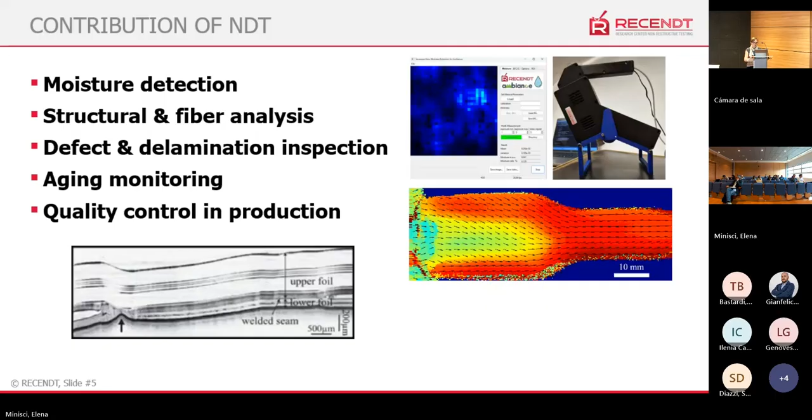So which methods can we use? There are many methods in NDT. We have acoustic methods, like acoustic emission or ultrasonic, which everybody knows from the hospitals. We have optic methods, like OCT or digital image correlation. There are the standard radiographic methods, like X-ray or CT. And we also have electromagnetic methods, like the microwave methods.

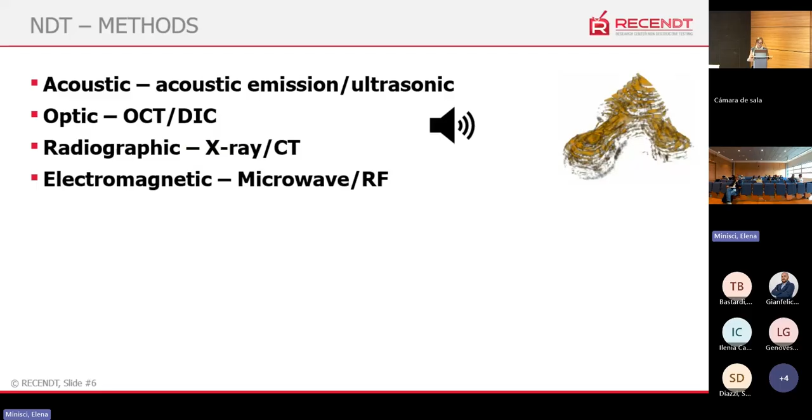Everyone knows the thermal, thermographic methods with the infrared camera. And there are many spectroscopic methods, like terahertz and infrared, for use in NDT. Recently, we have concentrated on non-contact methods, and this means we're using acoustics and optics.

Is there a question?

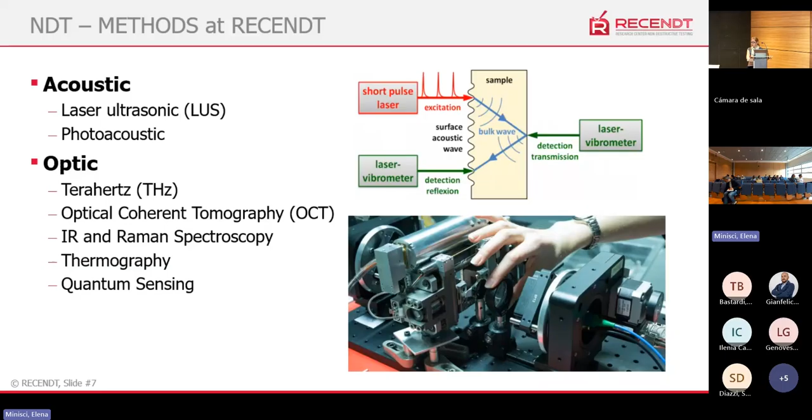Well, okay. Yes. We have the acoustic part, where we use laser ultrasonic and photoacoustics. And we have optic methods, where we have terahertz, optical coherence tomography, infrared and Raman spectroscopy, thermography, and also quantum sensing. Today in my talk, I will concentrate on four of these methods, which are more suitable for bio-based materials, and where I have some examples to show you what we can do with non-destructive testing.

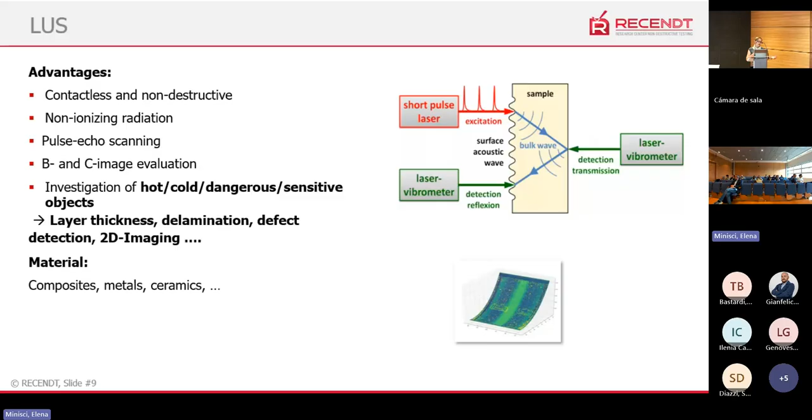First, I will start with laser ultrasonic, which is a contactless ultrasound method where we use a laser for exciting and also for detecting the ultrasonic signal. It is based on pulse-echo scanning, where we can make fast images in B and C scans. Due to the contactless behavior of this method, you can investigate at hazardous or dangerous places, really hot and cold materials, and also very sensitive materials. With laser ultrasonic, we can measure the layer thickness, delamination, and do defect detection in many samples.

Another big advantage is you can put it on a robotic arm, scan over big samples, and find delaminations or cracks in the samples.

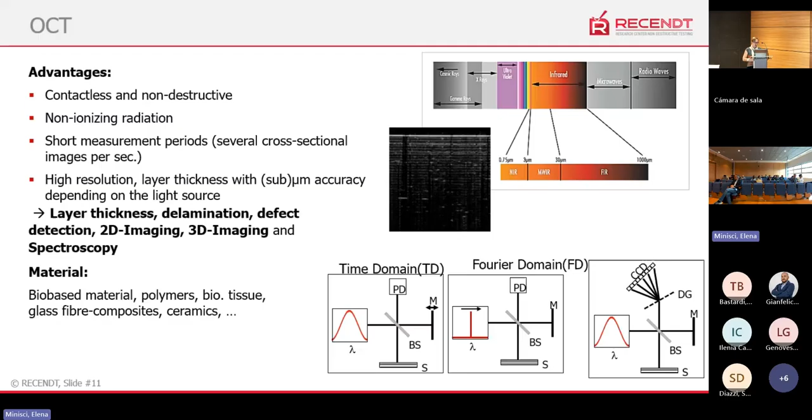Here we have also an example for quality inspection of a polymer UD tape where glass fibers are embedded in a matrix. And we want to scan during the whole production process at a special place to find out if the glass fibers are bundled or flat over the whole tape,

and give back some input to the machine to go slower, faster, if it's too bundled. And we can have a rough surface or a smooth surface if there's matrix over all glass fibers.

Another example was a direct in situ detection of the flow instability of an extruder, where we have one fluid down, which was a special adhesive, and the fluid up was HDPE. And we want to inspect and give parameters to the extruder, how to change the pressure or change the speed, faster, slower.

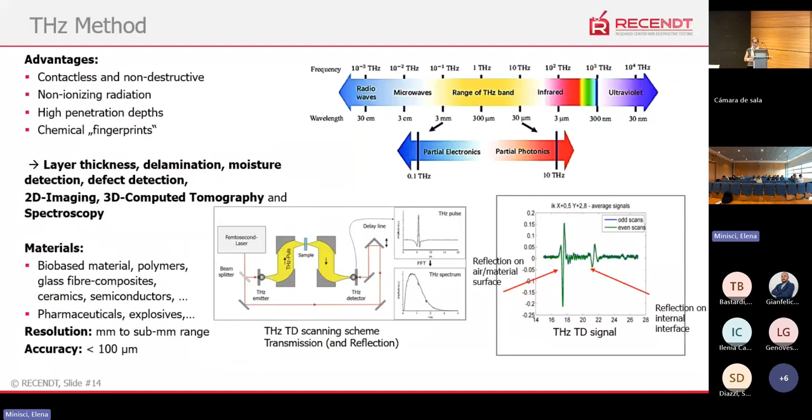and we can use it not only for spectroscopic measurements, but also to find out layer thickness, delaminations, or in our case, moisture detection. And we also can make 3D computed tomography with terahertz.

Here I have an example of how we can detect the layer thickness with the terahertz signal. We use the time signal where we have the front layer, the next terahertz pulse, the reflection coming back from the second layer, then there is a little air gap between. In this case, we could also be detecting some delaminations, and then the last layer.

And in this case, we have a multi-layer, so we can image the different layers. But if we have only one single layer, we can also get the spectroscopic information, the chemical fingerprint of the polymer or of other chemicals inside.

For some reasons, it's very important to go around the samples to get more information from the sample, especially if you have something inside the tube or want to know about it, and don't want to cut the polymer tube or the layer. So a CT can be a great advantage.

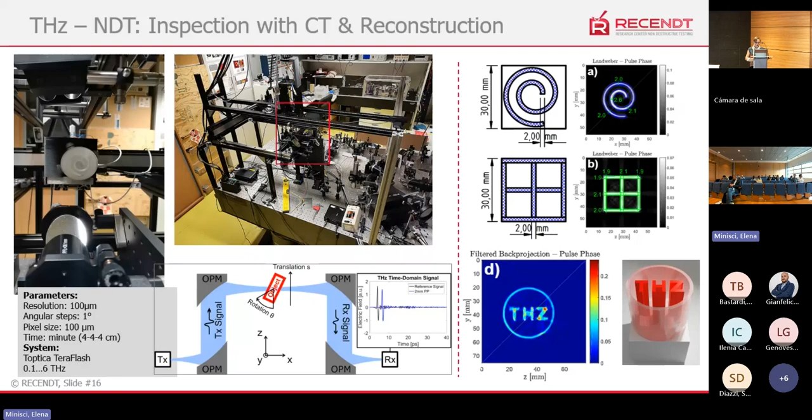Another advantage of terahertz is hyperspectral imaging, which you can use during production to find out if you have the right combination of polymers and chemicals inside, and also to find something that you don't want. In the recycling plant, if there's something in your recycled material that you don't want for recycling.

And afterwards I will show a small demo with this moisture detection sensor, which was developed in the AMBIANCE project for detecting moisture in panels which sit outside. For that we use a sub-terahertz source to illuminate the samples. It can be all kinds of bio-based samples if you calibrate the sensor for them.

The reflected signal we get is summed up over the 2D image to take the mean, and we can calculate back to the moisture in the sample.

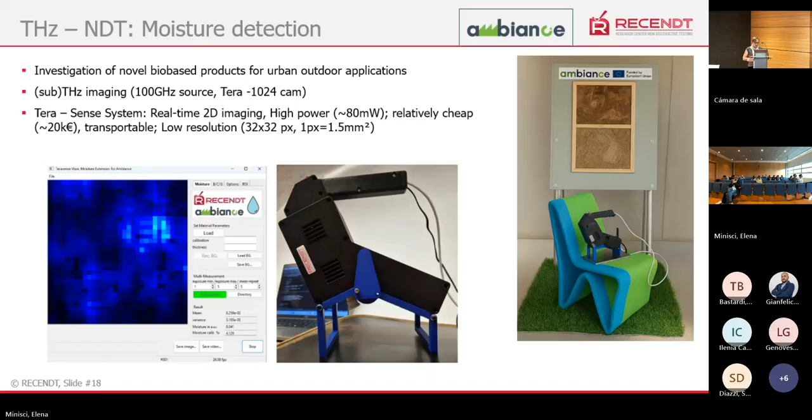Another important method in RECENDT is infrared spectroscopy. You get the main information from the vibrations of the molecules in the samples, and you can use it for all kinds of solids, liquids, and gases. But you have a lower penetration depth, so mainly you get the information from the surface. But that information can also be important for all of us.

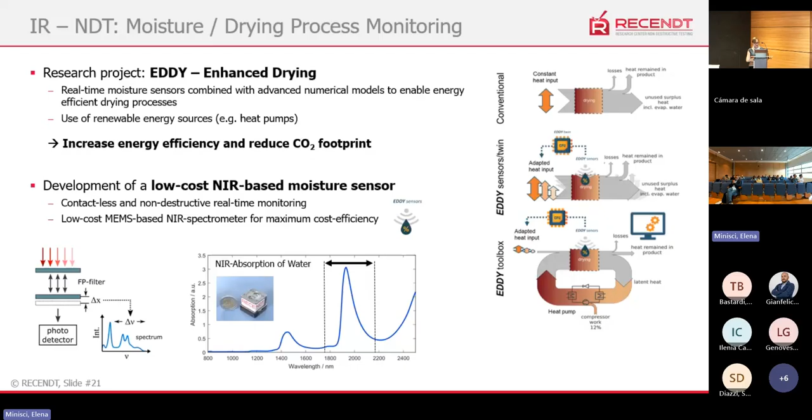So in short, to sum up, NDT is a broad field of many things: you can see, characterize, evaluate, image the whole thing, and also make a process optimization, getting into processes in combination with machine learning. You can optimize the processes definitely better and get more information.

But it's not always easy to have the right method. You have to choose which is the right method. It depends on the material. It depends, do you need high resolution and a low penetration depth, or do you need good resolution, but some of these methods, just like X-ray, have ionizing radiation, which is not healthy.

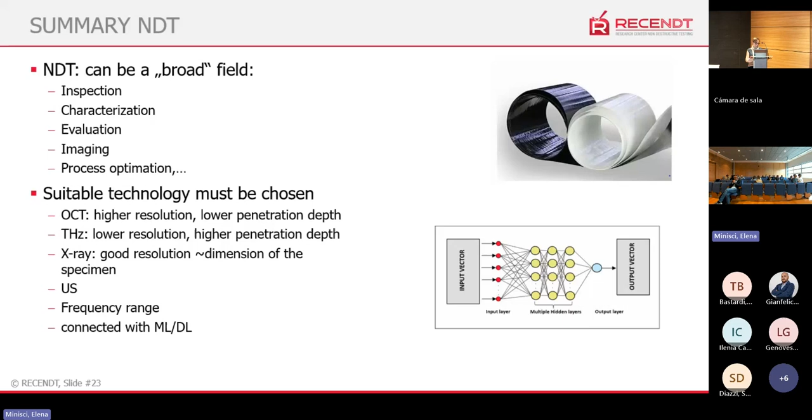And for NDT, the outlook is, there are many things they are doing in making sensors. They are getting smaller, embedded directly in something. We can use conductive polymer layers to make smaller sensors. And then you can easily use it everywhere. And if we combine all of the most important NDT methods for us, we can get more information. And in combination with robotics, you can be flexible.

A big point coming up nowadays is the data analysis in combination with artificial intelligence and machine learning. But we don't have to forget that the machine learns from us. So there must also be somewhere to control. And this will be a long process to get artificial intelligence

into the companies, because you need to collect data, control the data, supervise the artificial intelligence, and it will be a lot of work to implement it so that it runs smoothly in the production.

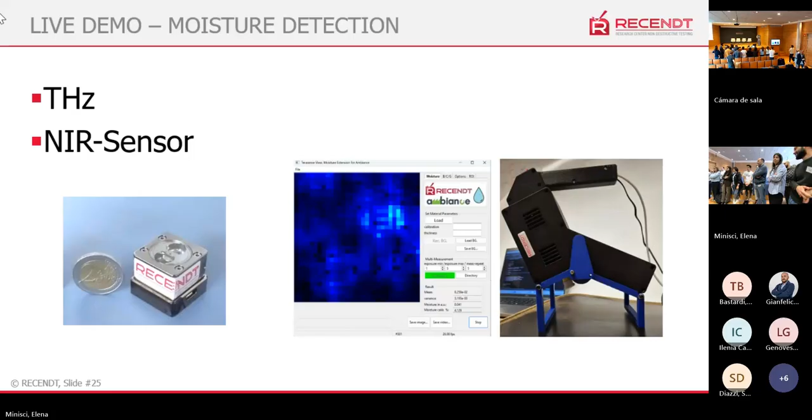The sharing, we have someone, yes. Can you see it? Yes. Okay. Now we see. Okay. Yeah.

We have here this terahertz sensor where we put a sample. We need some reflective foil behind it. It's not perfect because there's some air between. But you can see the reflection and you can see my finger. It's highly absorbing water. Want to speak a bit louder? Okay. Does it work better?

Yeah. And the terahertz source is here and illuminates the sample. And now it's dry, so it's in reflection, but we don't have any absorption in the measurement. And if we get water on the sample, you can see the terahertz signal is absorbed and reduced. That means higher water content in samples means lower terahertz signal coming back.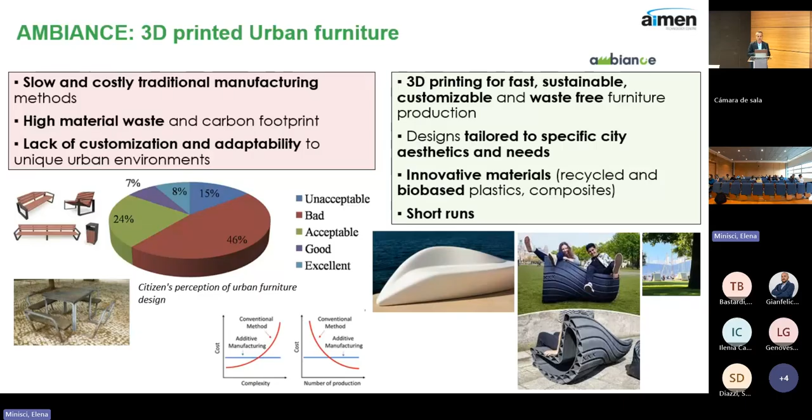So I will skip this slide because it's just to put in a fancy way the many benefits of using 3D printing compared with other manufacturing techniques. But let's focus on what we have done with the material for the AMBIANCE project. So here in the slide, I'm showing some of the general requirements that we established at the very beginning of the project for the material to be used in AMBIANCE for the fabrication of the urban furniture element.

So of course there is a cost factor, so the material should have a reasonable cost. The material should be bio-based as well, should be available in large quantities, and it's mandatory that the material be processable in large format fabrication. It should also have adequate mechanical properties, and optimal resistance against UV and humidity, because those are elements that are going to be exposed outdoors.

So once we knew all those requirements, we started to look for appropriate materials for the AMBIANCE project, and we decided to focus on PLA. Why PLA? Because the cost is reasonable, there are many producers of PLA, there are many different grades of PLA available in the market, and we know for sure that it's a material that is simple to process whenever it comes to 3D printing. So once we decided to go for PLA, we started to look for the most appropriate materials, and we selected four.

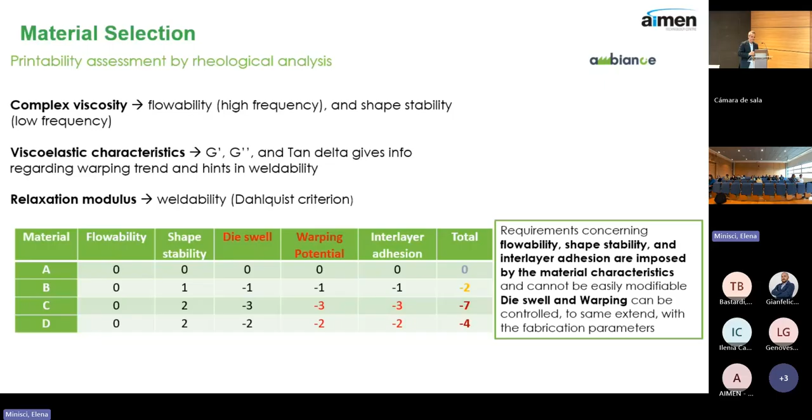So once we selected material B for going to large scale, the next thing was to do actual fabrication trials in the large format fabrication cell that we have here at AIMEN. And as we could foresee from the rheological analysis, we observed warping and delamination.

So what are the causes of warping? There are two main reasons: one is more physical and the other is more physical-chemical. The first reason is thermal contraction, since all materials contract whenever they cool. This is something we had somehow controlled by adding fillers.

By adding fillers, we are able to lower the contraction that the material is suffering. But there is another factor playing in the warping, and it's the ability of the material to relax stresses, related to the viscoelastic nature of the material. And this is not something that we can easily change by adding fillers.

We need to modify the chemical composition of the material. How do we do it in Ambiance? Basically, here we blend the original material B with another material with a more amorphous nature, increasing the viscous character of the blend. So we did many different trials, adding different amounts of fillers and different fractions of the amorphous material until we got the sweet formulation.

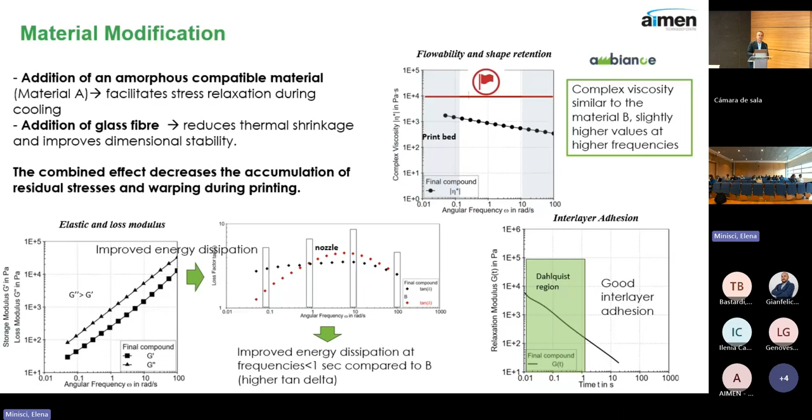Of course, once the material was prepared, we gave it to our colleagues who do the actual fabrication for manufacturing the urban furniture elements that we have fabricated in Ambiance. But besides this adequation of the material for 3D printing, another relevant issue here is to assure that the material is able to withstand outdoor conditions, so resistance to humidity and UV radiation.

And we have verified this in two different ways: with laboratory tests using a climatic test chamber, and also in real exposure tests that started 3 years ago in May 2023 and just finished a few weeks ago. So 3 years of exposure. I have no time now to go into detail.

I will give the floor to my colleague Xabier to discuss the fabrication of the elements in Ambiance, but what I can tell you is that the material compounded here at AIMEN passed the durability test successfully. And that's all from my side. So Xabier, the floor is yours.

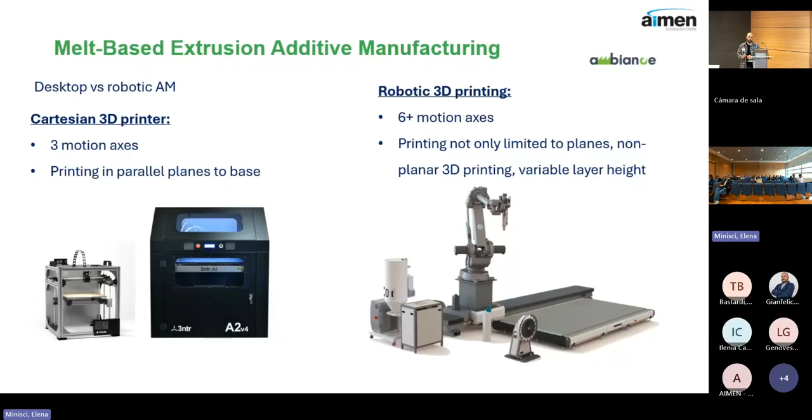On robotic 3D printing, it's more industrial. You have 6+ motion axes, as you can see in this image - 6 motion axes on the robot and 1 external on the track that moves the robot sideways. In this scenario, printing is not limited to planes. You can do non-planar 3D printing and also variable layer height, meaning that, for example, if you're printing a curved pipe, the external radius will have a higher layer height than the interior curve of the pipe radius.

Since these two motion platforms are quite different in their positioning strategies, I would like to go over the design strategies you need to apply to convert a standard part into one manufactured by additive manufacturing. These apply to filament 3D printing, pellet-based 3D printing, and robotic Cartesian printers - they are the basic ones.

So we can see that wall thickness should be tailored to the bead thickness produced by the nozzle. You should take care of overhang angles and use integrated supports, meaning you adapt the geometry so you don't need support material, since you're always working against gravity unless printing non-planarly, as we will see later. Also, you should apply rounding strategies like fillets for corners, adapted to the diameter of the nozzle. Chamfers are also a strategy for overcoming overhangs, and you should carefully consider part orientation to minimize the amount of supports or overhangs your part will need.

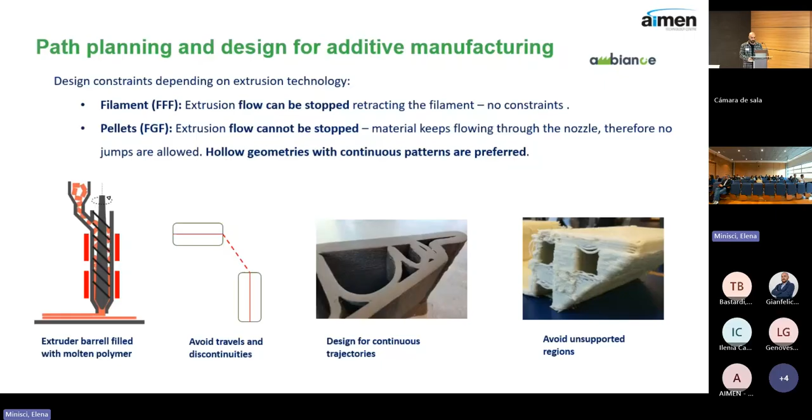So I will begin by giving you some context of the construction sector. Mainly, the problem with this sector is that it's highly polluting. Basically, the use of Portland cement in its production generates a lot of CO2 because of the high temperatures needed for the reaction, and the reaction itself releases CO2. So there is a need for more sustainable materials.

And on the other hand, we have a problem with the manufacturing techniques, the technologies. The most common is casting using formwork, but this technology has some disadvantages. For example, it's time consuming, some occupational hazard for the laborers, it's a waste generator, and presents also some design limitations, some freedom of design.

So there are some alternatives in terms of materials. We have plenty of options. Low carbon binders, the most common are supplementary cementitious materials and calcined clays, LC3. But the problem with this is it still contains some amount of Portland cement. So in AIMEN, we promote more Portland-free binders, for example, geopolymers and alkali-activated materials, very common. But there are also other options like bio-based cement that I will focus on in my speech. And other options are lime and earthen materials that have some specific applications.

On the other hand, in terms of novel manufacturing techniques, the most promising is 3D printing or additive manufacturing. And the key is because you have more automation of the process that brings advantages, for example, reducing the human error and improving safety for the workers. You have more freedom of design to print complex geometries, faster building, and reducing the cost and the materials efficiency.

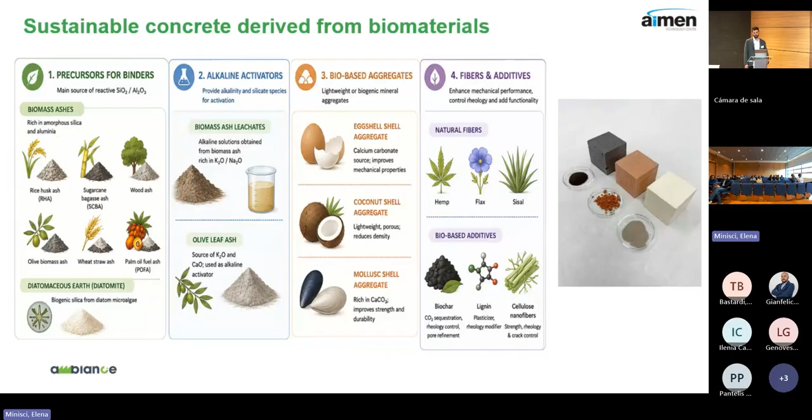For example, one option is biochar, which is a fancy material that encapsulates CO2. So you have not only a low carbon cement, but a carbon negative cement. Lignin works as a rheological modifier to improve the dispersion and the rheological properties, which is very important for 3D printing. And finally, the last option would be to introduce cellulose nanofibers, which increase the mechanical strength, reduce cracking, and improve the durability of the material.

This slide is just an overview of our portfolio of R&D projects. In our sustainable construction group, we have been researching this line for more than 10 years in different R&D projects, and have collaborated with different universities, companies, and institutions. Our main role in these projects is as the partner that develops the material from waste into a high performance functional material. Depending on the application, for example casting or 3D printing, we change the formulation. But our main role is to develop the material and validate it with our industrial partners.

Some of the applications we have validated in our R&D projects, collaborating with our industrial partners in relevant environments: for example, in the Geopolar project, we developed geopolymer bricks and built the small construction model that you can see in the image. In the same project, with a different material, we developed material for pavements. And in the GeoCel project, we developed a highly porous material obtained by the addition of a foaming agent. It was good for thermal insulation properties.

In the upper right, we collaborated with a steel plant in the CIRCOM project, and in this project we developed two materials with high thermal resistance. They were used in two different applications, foundry molds and refractory concrete. We obtained very good results in this project.

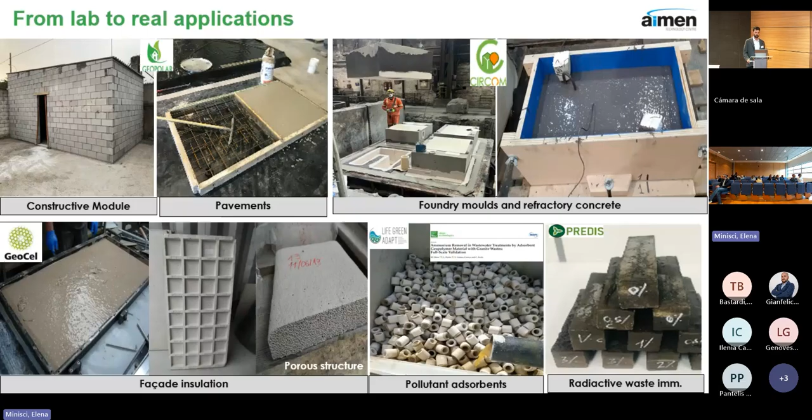These cementitious materials can also be applied in alternative applications apart from the construction sector, more related to the environment. It was the case of the Life Green Adapt project, where we developed cementitious materials with adsorbent properties that we used to remove pollutants in wastewater treatment. And finally, in the PREDIS project, we collaborated with CIEMAT, and we used cement materials as a matrix to immobilize radioactive wastes.

In the last 2 or 3 years, more or less, we have put a lot of effort into 3D printing. Our main role is to adapt our low carbon cements to 3D printing processes. We currently have 5 projects related to 3D printing. 2 of them are with bio-based materials, the Biogemse and Coral projects. Coral is also interesting because we have to develop artificial reefs for the marine environment.

To carry out the work of these projects, we have 2 printers. A small one, very useful for testing experimental materials. It's a Delta model from the Italian company WASP. And the other one is a robotic system. We are setting up a robotic cell right now, and we hope it will be operative in a few weeks or months. Basically, it's an ABB robot with a print head from the Dutch company Vertico with a 2K system that gives us the possibility to add an accelerator and to have 2K materials.

And the idea with this robotic system is to pass to the next level, not only be experts in material, but also in additive manufacturing, design, planning, and so on, and printing bigger components such as panels, beams, pillars, and so on.

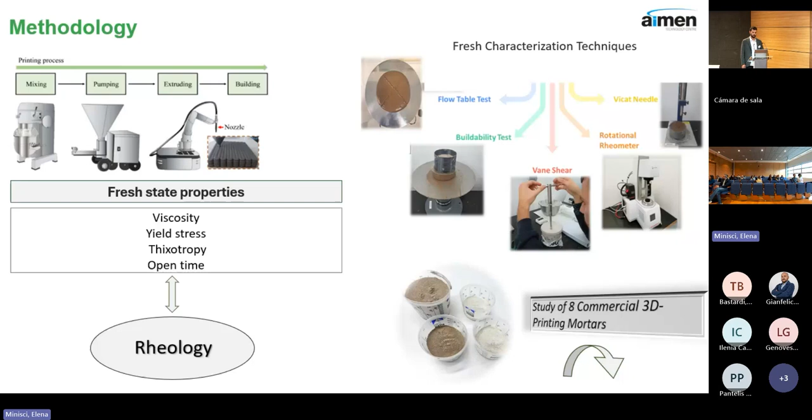So we did this work, and we are now at a point that we know exactly what we need to achieve in order to have a printable cementitious material. We have some criteria in terms of initial flow, buildability, and yield stress. And we also study the evolution of these rheological properties over time, up to 1 hour at 10-minute intervals, and we see the evolution in order to establish also the open time of our materials.

And we complement these fresh characterization techniques with a more complex rheology with a rotational rheometer. It's the same that Ricardo saw before, but we have changeable geometries, and we use one geometry suitable for building material, which is called a BMC. That is basically a vane stirrer with a cup we fill with our sample. And with this equipment, we can carry out complex rheology.

I can highlight two important tests. The first one is the yield stress test. Here we apply to the sample a very, very low constant shear rate, and we obtain a maximum, which is the static yield stress. This stress is the pressure that we have to apply to our cement in order to start the flow. We also analyze the evolution of the shear stress over time.

And the second test is even more interesting because it simulates the 3D printing process. It's called the 3-interval thixotropy test. Here we have three regions of shear rate. In the first one we apply a low shear rate, which is when, for example, the cement is before extrusion, for example, in the hopper.

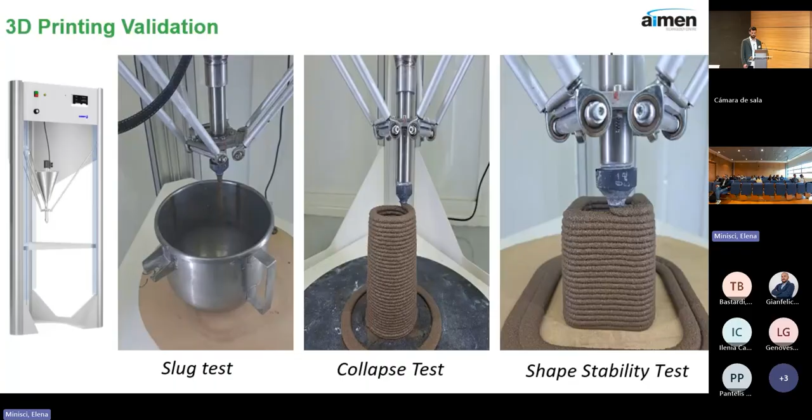And finally, it's also important to check mechanical properties because we are talking about building materials, so durability and mechanical properties are important. And in the case of 3D printing, it's also important to analyze the anisotropy, because 3D printing generates some anisotropy depending on the printing direction. So this is something that we study in our projects.

We printed 3 different slabs in the 3 different directions, X, Y, and Z. And we cut each slab into specimens, and we carried out compressive and flexural tests. And we observed that in terms of compressive, there are no significant differences, but in terms of flexural, we saw that the Z direction is the lowest, followed by the Y, and the X is very, very close to what you get if you manufacture with a traditional casting method.

And in this slide, I just want to highlight some of our printable materials developed in our R&D projects. In the upper left is a printable Portland cement that we use as a reference, as a benchmark. A metakaolin-based 3D geopolymer. Metakaolin is not a waste product, but it's more sustainable compared to Portland cement, and I just want to highlight the mechanical strength, 50 megapascals, which is good for a 3D printing material.

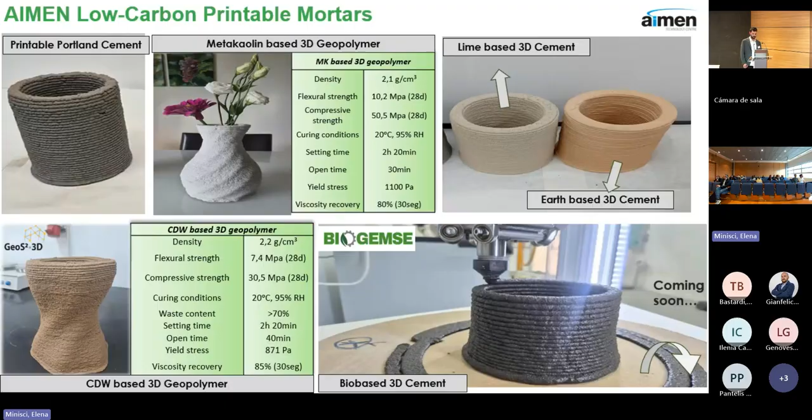And this project, Biogemse, is an important European project from the Horizon program, and it's structured in 5 different pillars: functional bio-based materials, which is mainly carried out by us, by AIMEN, but there are other pillars like generative AI design, custom AI systems, digital, and finally, the demonstration that will be 3 smart living labs. The main role of AIMEN is in developing the functional bio-based materials, and also we are going to help with the final demonstration.

And the next phase, where we are right now, is to improve the printability. So in this phase the rheological admixtures are very important. So we are trying different strategies using superplasticizers and thixotropic agents, fibers as well, in order to induce good printability properties. And we hope that we will have our base printable mortar very soon.